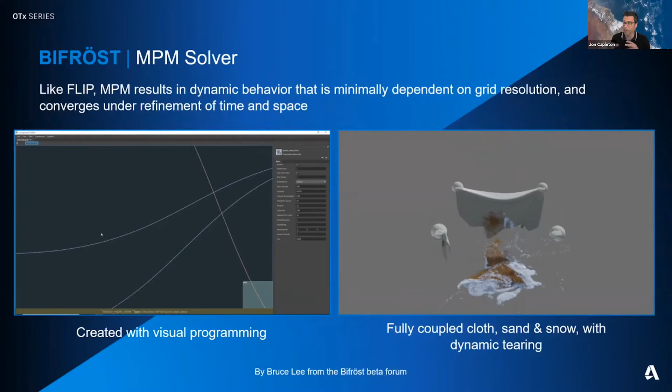Here's an example of those different materials coming together and being solved as one. We've got the sand and snow coming together and hitting the cloth, and that's all solved in one solver. It's the weight of the sand and the snow that rips the cloth as it goes through.

Okay, just a few more examples of MPM in action.

This example is really great, and it came from Disney's Frozen originally. You see the snowball on the left-hand side there, and it has this wonderful rigid body dynamics coupled with that sort of particle effect as well. That's the MPM solver in action.

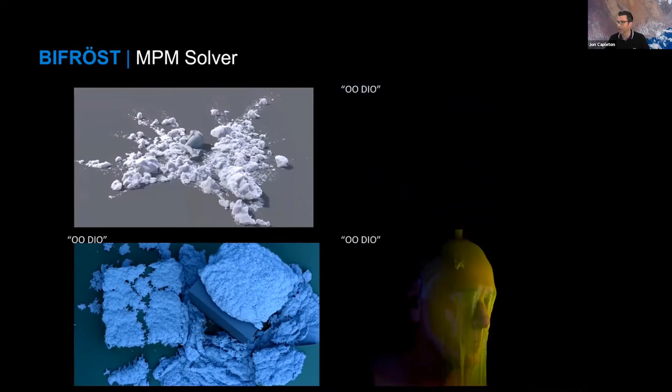And it's also good for liquids. When I say liquids, I mean quite viscous liquids. So in this case it's a bit like snot, but if you were to do water, you'd stick to the original Bifrost system. Like I said, it's a physically based solver.

So the avalanche here on the right has been triggered by that little snowman. Okay, so MPM is also good at cloth.

So here we have this cloth in the middle, which is kind of the high geo in the middle. And if we just open up the graph editor, the input there is the cloth geometry in the middle, and we just need to take that and turn it into an MPM cloth.

We're going to constrain that cloth to those two bars either side. So simply go and grab cube 1 and cube 2, drag them and drop them into the graph, and just hook them into the constraint geometry node.

And then, of course, we need to simulate that, so we've got the simulate MPM node there. Each time you do this, you need to put the settings node into the simulate MPM node, and this is true for everything, not just cloth.

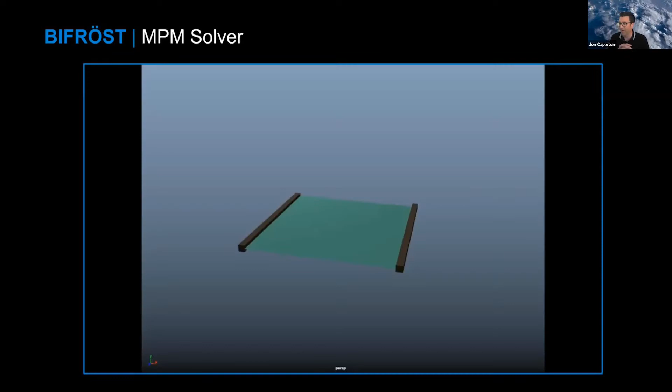And obviously, it's been simulating, so I'll just speed this up and do a quick play blast. And there we go - it's a very simple, very quick setup, but it demonstrates how good it is to do something quick and simple, out of the box.

Okay, I'm just going to move on.

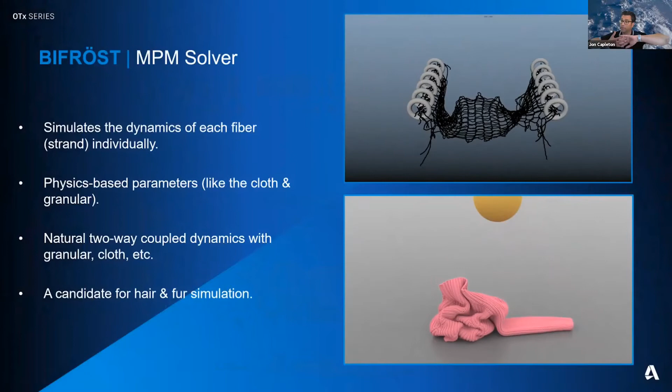So as well as the cloth solver, there's the fiber solver as well. This is not a cloth solver, it's a fiber solver, so what it's doing is solving every single one of those pieces of fiber. And that knit has been procedurally produced in Bifrost using strands.

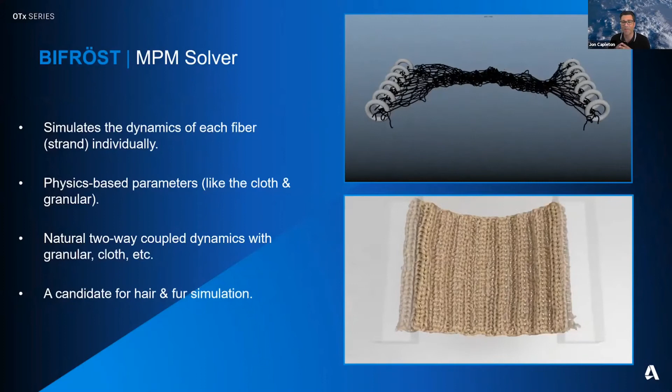So that's been using MPM's fiber solver. Okay, so that just brings me nicely onto strands.

I just want to mention these very quickly - these are great, these are brilliant. If you were a Softimage ICE user, you'll probably recognize these. Here are some early tests with the strands, and somebody on the beta forum created a plant generator using the strands, which is interesting.

But they can be really used for some nice things. This is an example of not only strands, but strands around strands, and you can also instantiate down the length of the strand. So what we've done here is model one chain link and then have that instantiated down the length of the strand. The animation is driven by a velocity field as well in Bifrost, part of that Rebel pack I mentioned earlier.

I'm just going to talk a little bit about the aero solver, just to separate it out a little bit. It creates smoke, fog, mist, and vapor, that kind of stuff. And if you've used BiFluids before, then you could kind of compare it to that, but it has a much more improved accuracy, and it's integrated with Viewport 2 and Arnold.

But the most important thing that I want to stress with this, it is adaptive. I'll talk a little bit more about that in a second.

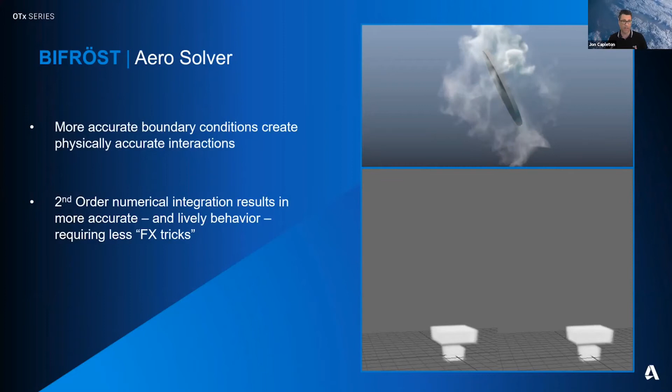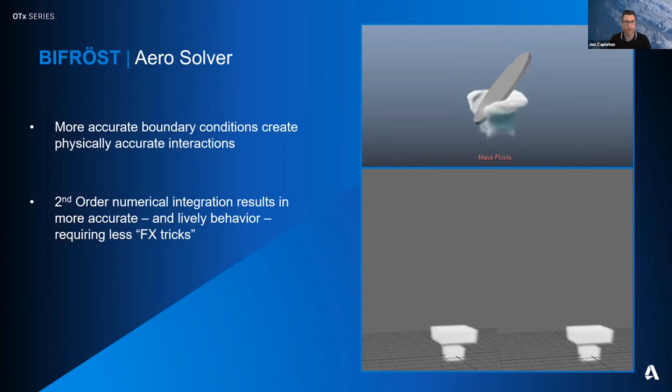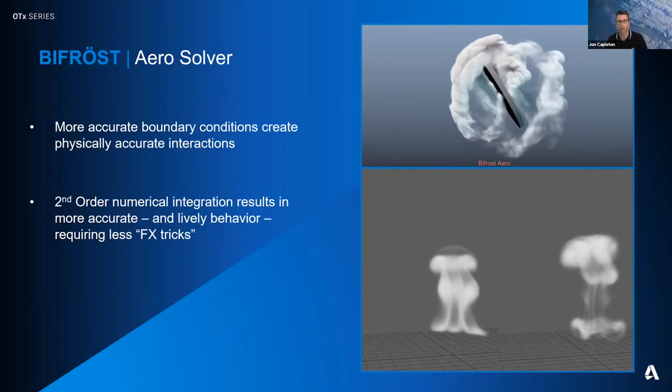One of the key differences is that it sets better boundary conditions. So that's old Maya fluids there, and this is the new Bifrost Aero. You can see the difference between the old fluids and the new fluids. The old one is just kind of pushing the smoke around versus the Bifrost solution. What it does to achieve that is it has a higher order of math to solve these different effects. You're going to get a lot more detail, a lot more push, a lot more of that lively simulation through there. It's the same down at the bottom there, so the right-hand side is the Bifrost Aero. You're getting a lot of extra detail created without any extra input or effects trickery needed from the user.

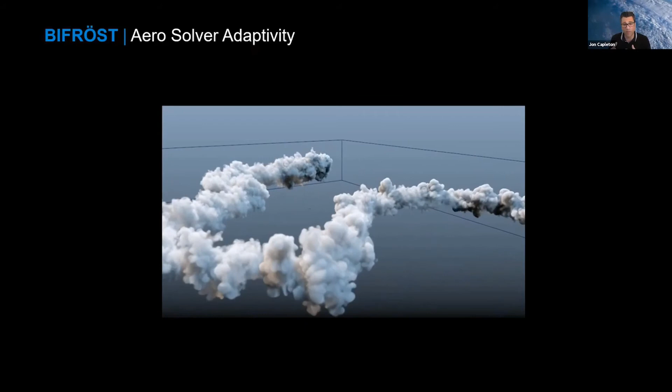I just want to talk very briefly about adaptivity in the Aero solver. Some of that extra detail and accuracy comes from a higher order of maths that the Aero solver is using, and that also comes with longer solve times. Higher order of maths means more calculations, which means longer solve times. However, we overcome that with adaptive sampling. What that means is we can create resolution for the simulation where it is needed. We can vary that resolution in the geometry, as you're about to see here.

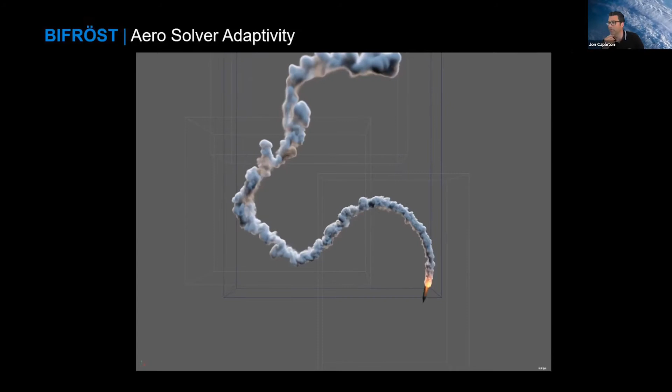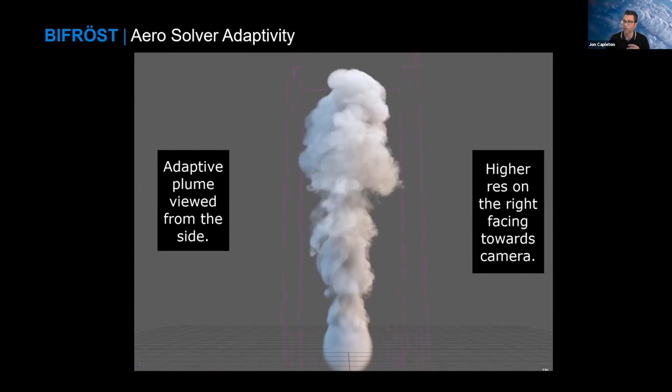So next, we want the resolution - we have two boxes here: the resolution at the back, middle, and the front there. You can see the different resolution as it comes through. You can set that resolution to be closer to the camera - here we are closer to the camera with a higher resolution as it flies through the different boxes. You can also mix resolutions as well, and have a pre-roll, so lower resolution at your pre-roll, and then when it hits your numbers, you want a high resolution. You can set the resolution to be high facing the camera, so the smoke behind is low and facing the camera is high. Basically that allows us to create really dense, heavily populated scenes.

So one of these plumes has adaptive sampling and one does not. I still don't know which one is which, but I'll show the numbers on what it is. With that adaptive sampling, you get 20% less voxels, it's about 22% faster, and it's a third smaller on file size. That's a pretty good saving when you take that over a sequence.

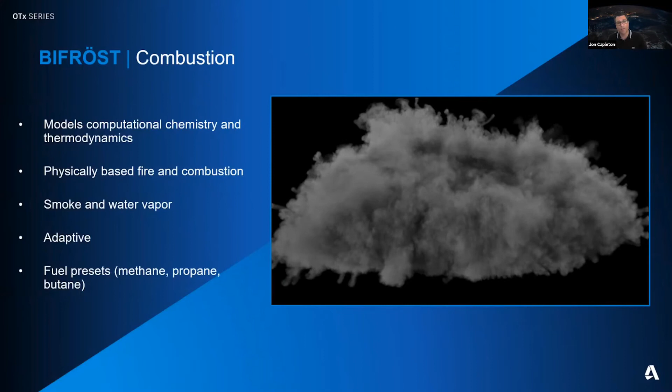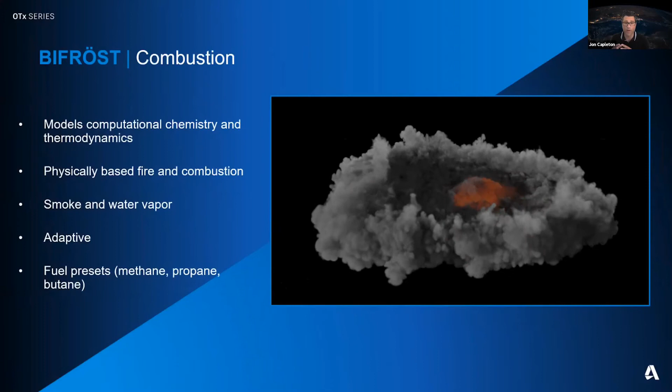That now brings me on to the combustion solver. It's very similar to the Aero solver, in that the Aero solver is the next generation solver for doing fluids, but the combustion solver is the same thing when it comes to combustion. We're able, at this point, to simulate real-world physical combustion reactions. It's based on computational chemistry and thermodynamics, so the fire and the combustion that it creates are physically based in reality. It produces smoke and water vapor and comes up with some very, very realistic results.

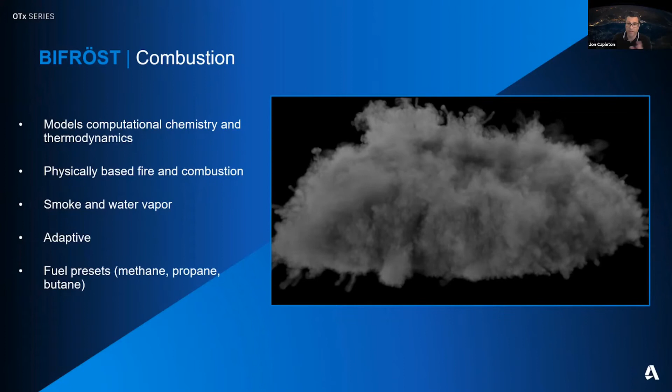But very importantly, like the Aero solver, it's adaptive as well. Being physically and chemically real, you can have presets too - you could reasonably expect to go on set and ask the pyrotechnic guy or special effects guy what fuel they're using, in what quantity, and for what given burn. You could go back into Bifrost, pick the right presets, and expect to get very similar results straight off the bat. If you don't have a preset, because perhaps it's an exotic fuel or not widely used, you can potentially find those numbers out and just type them in, and again expect to get a very similar result. Here's a large volume of methane, very similar to what they've been using on the film Backdraft.

So I covered that very quickly, kind of a whistle-stop tour of what's been happening there. I'm just going to talk very briefly about what's to come in future episodes.

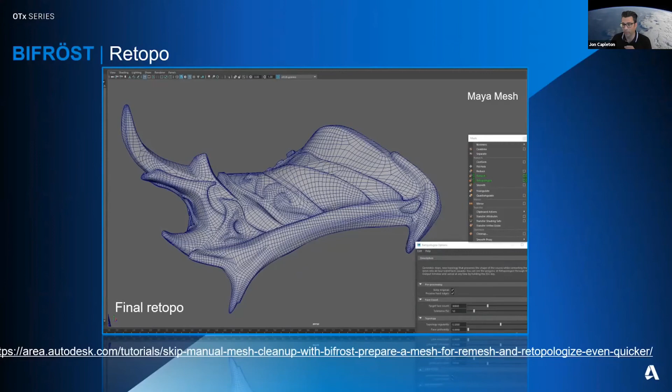Another thing to come is the character pack. People are getting very excited about this, and you can do a lot of things already using the core building block tools. A lot of TDs and riggers, very technical guys, and they've been playing already. But the goal is complete procedural rigging, that's geo-independent rigging, and that will be a game changer for VFX when that happens. It's a little way off yet, so it's not there quite yet, but it will be here.

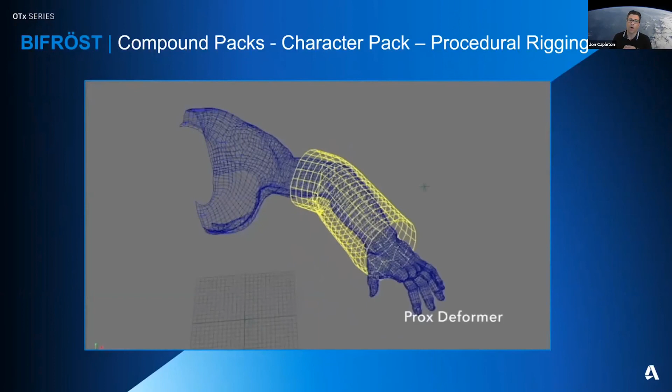But there is an area worth pursuing right away, and that's the creation of hybrid rigs, made with a mix of DG nodes and Bifrost graphs working together. That simplifies the rig complexity in the node editor, so you can rapidly prototype new constraints, solvers and deformers without having to drop into C++ dev. Another thing to note is that Bifrost graphs are treated just as regular DG nodes, so cache playback is supported as well.

Like I said, a lot of technical guys have been jumping into the core building blocks and building their own stuff already, even though we told them it's not quite ready for you. They did it anyway, which is great.

Philip Czar created this real-time collision deformer that reacts to the floor plane. Pranay's made... let me press play on that one... he's already made a muscle system, which has this lovely jiggle to it, and Duncan's been doing some IK deformers.